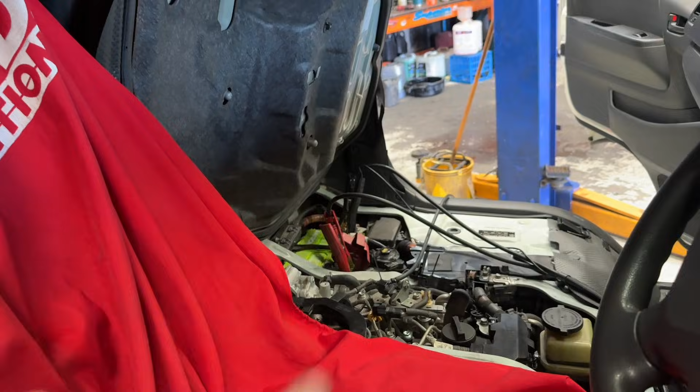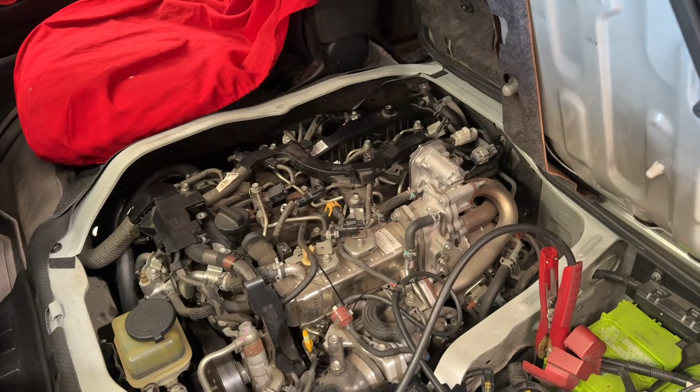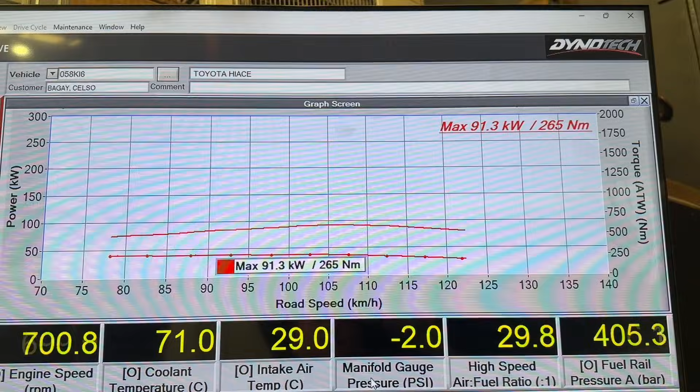In here, we're putting some plus 30s from Diesel Geeks, and down there is a Gturbo G300. Yeah, should be a good thing. Let's get on the dyno and see what she does. I had already done a previous run. This was stock. We did this last week before we did the mods. So 91 kilowatts and 265 newton meters of fury. Let's see what she does now. It's got some bigger upgrades.

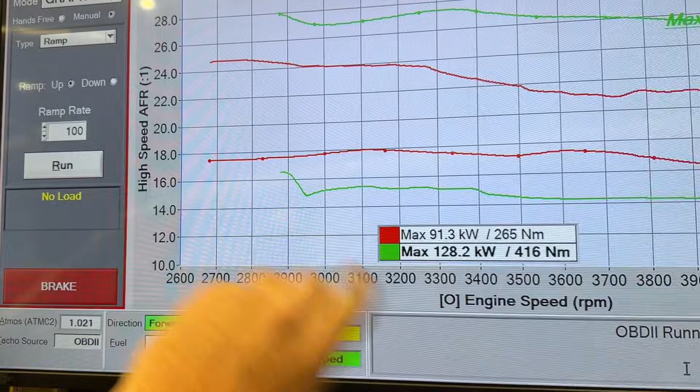So the first one, a little bit too sweaty. So you can see, I went a bit too fat in the first run, but good gains. But yeah, I just need to adjust this. We can play around with the boost as well, get a bit of a flatter line. But we're getting there. That's only first run. So now I've got some data, so we can see what it's doing, and we can make some adjustments.

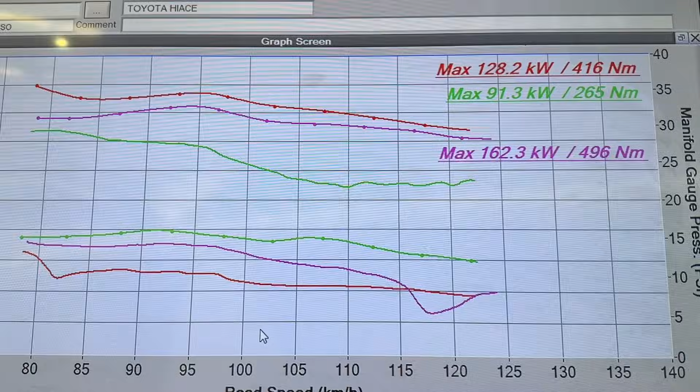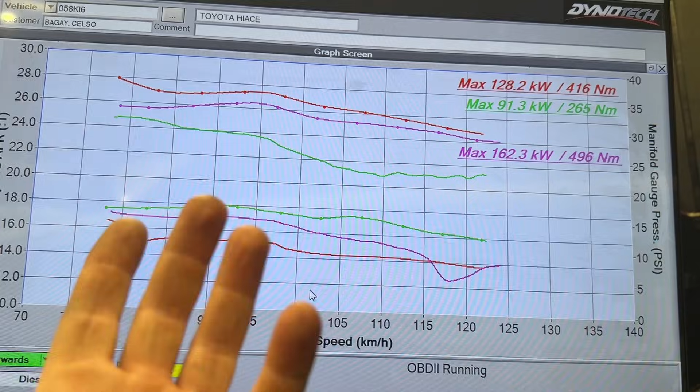Go again. So after another adjustment, we've got some there. So we've got a little bit less boost, but we're a little bit less fuel as well. But we're making more power and torque. So probably a couple more adjustments. It doesn't come out of the box first time every time, obviously, but new vehicle as well. So I'll have some more adjustments and see where this ends up.

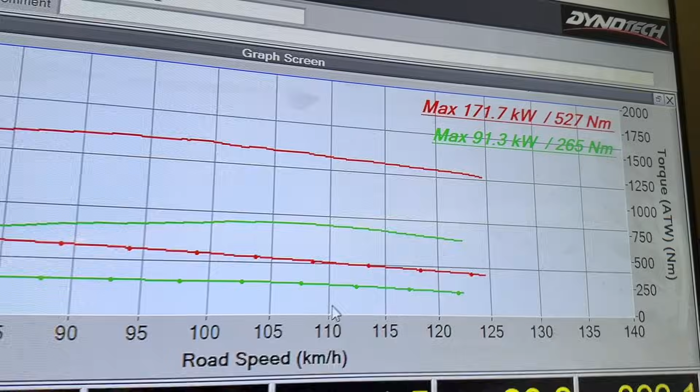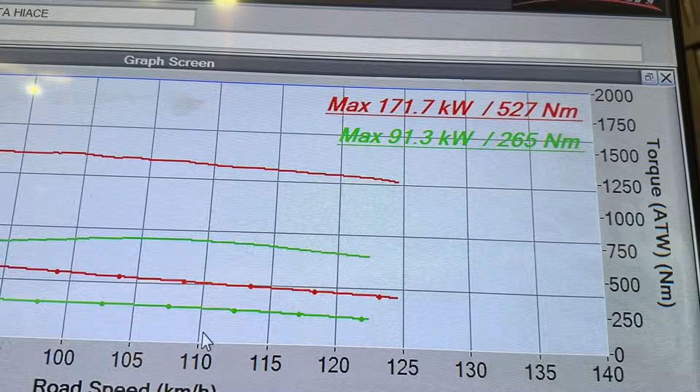There we go, you've seen the run. It's taken me about 6 or 7 renditions to get it right. But here we are at the end. It's still running here now. But so in at 91 and 265, out at 171 and 527. I'll put the horsepower readings up here so you know what that is in horsepower. But look at the gain, massive power gain, massive torque gain. You nearly double the power and about the same or more in torque.

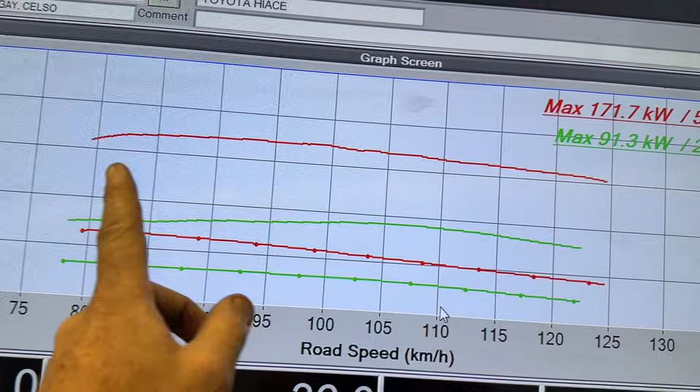Big gains. So now there's more in this turbo, but we're just going to keep this nice, reliable. We've done an auto tuning as well, so it should have 4th, 5th, and 6th lockup. Should drive really nice. Be super responsive. It's making that power and torque flat the whole way. You can see it's flat. You look here, it is flat, and that is flat. So that means it's going to be an awesome drive. It's going to have a wicked power curve and a wicked torque curve where it's just continuously pulling, and it'll be super nice to drive.

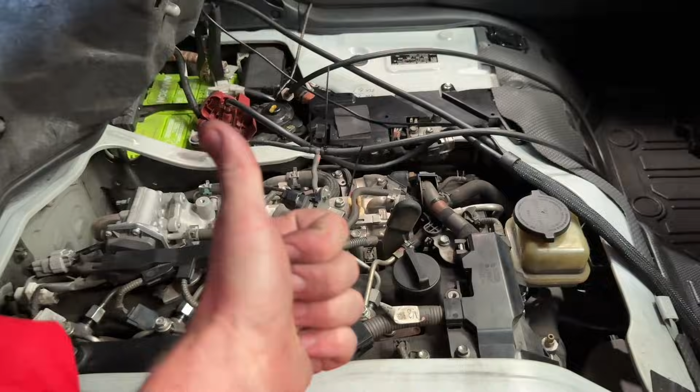If you want to have some goodness in your Hiace, we can keep it generally pretty stock. It's just some injectors, a turbo, and she's good to go. So in the Hiace, G300, plus 30 injectors, I've driven it, she's hella fast. I'm going to get Jess to drive it and see what she thinks. All right, let us know what you think, Jess.

Oh my god! Fucking fastest postman in Cleveland. This thing is an absolute weapon. Alright, we better check, make sure it's good, so we'll go again. Take 2. We're going to 60 obviously, so it gets to 60 really fast.